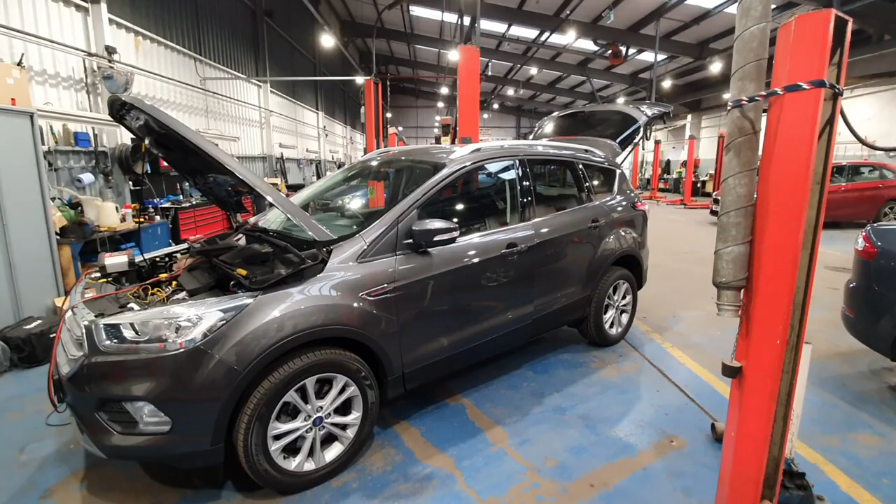Hello and welcome to another SJ Diagnostics video, and today we've got a 2018 Ford Kuga that's got a battery drain.

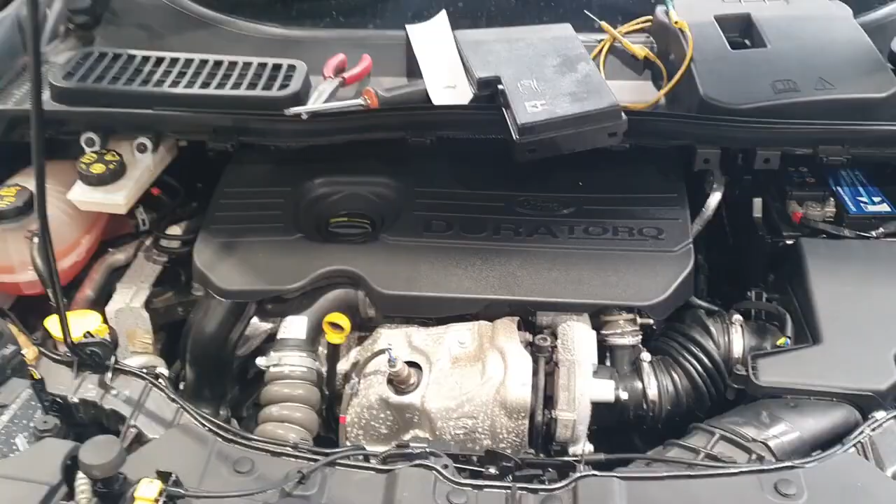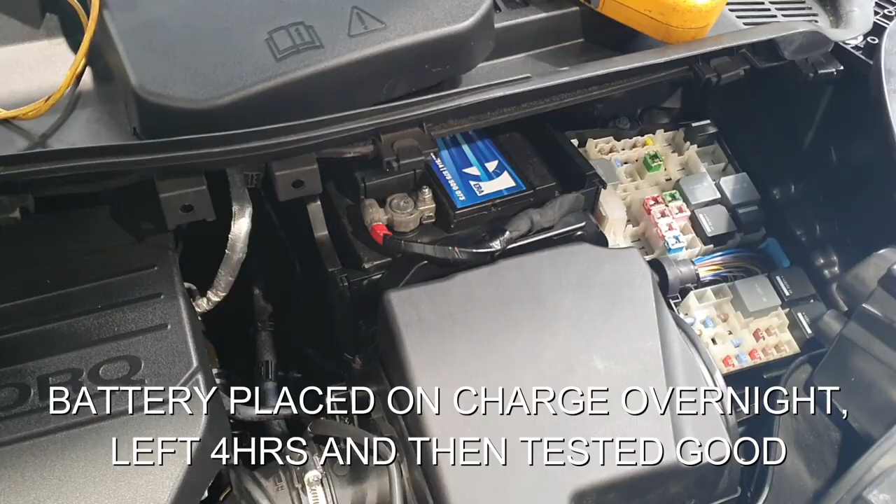So the vehicle came to us on the back of a recovery truck with a flat battery. They've told me it's a brand new battery. It's a make I've not seen before. I think it comes from a well-known 3-letter parts supplier in this country. So I'm going to put the battery on charge for a few hours and do a battery drain test, shut the vehicle down, see what sort of drain we've got.

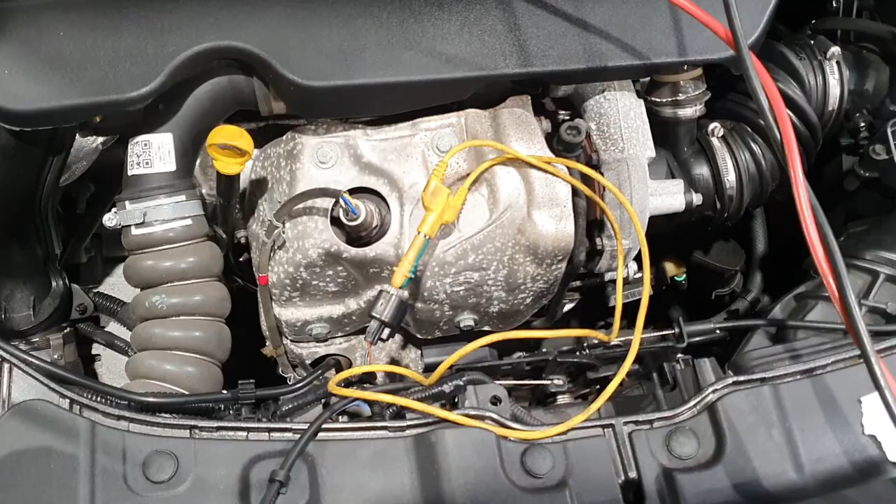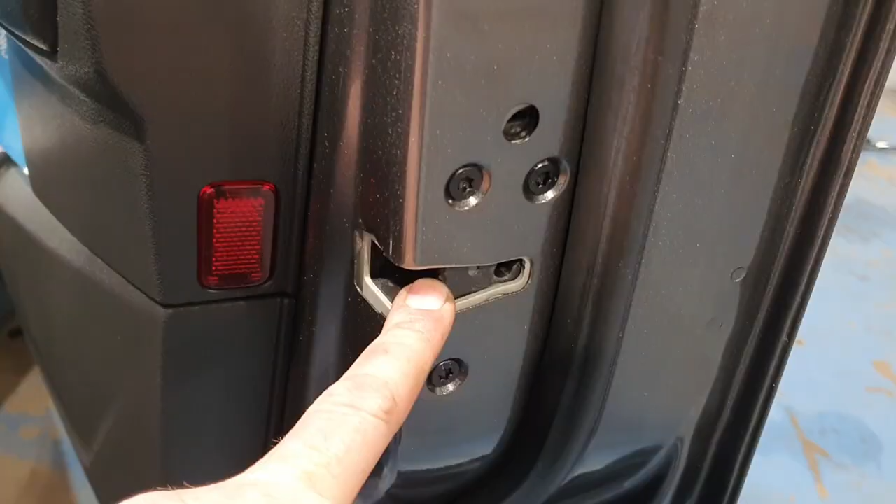So my method is, I roll all the door locks, simulate that the vehicle is completely locked up, but I've still got access to the vehicle. So I've just bypassed the bonnet switch, and I've rolled the catches on both front doors and also the tailgate. And I've also put some tape over the ultrasonic sensors for the alarm, and a little bit of tape on the steering wheel just to remind me that we've got tape covering up the sensors, because I have been known to send them out with the tape still on there.

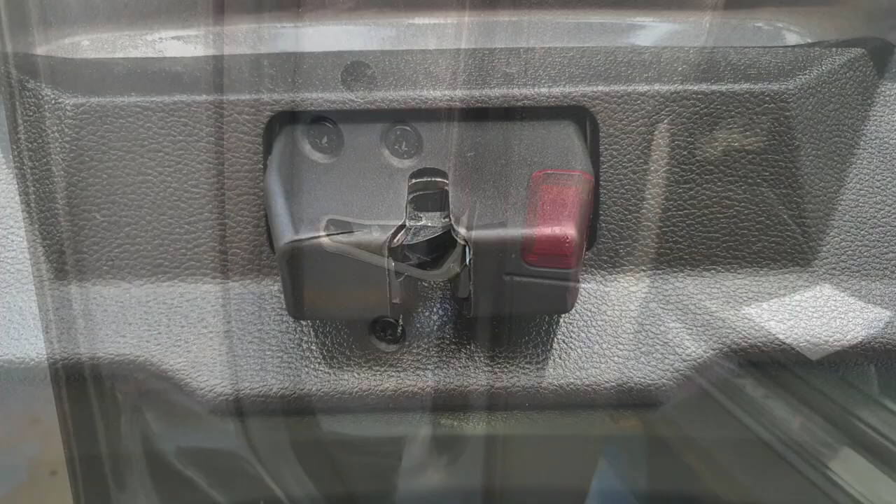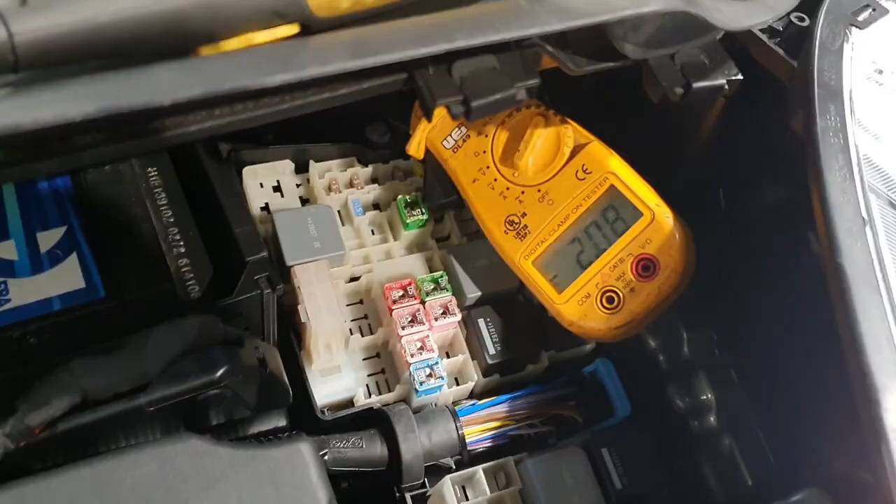Then we'll lock the vehicle up and see what drain we've got initially, and we'll go back to it in maybe 40 minutes time. So I've just locked the vehicle up and it's got an initial current drain of just over 2 amps. So we'll go back to it in about 40 minutes time and see what drain we've got then.

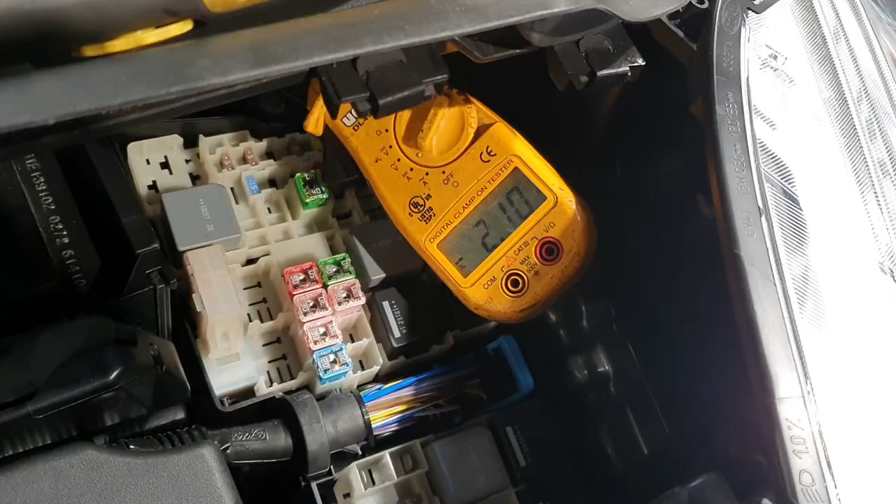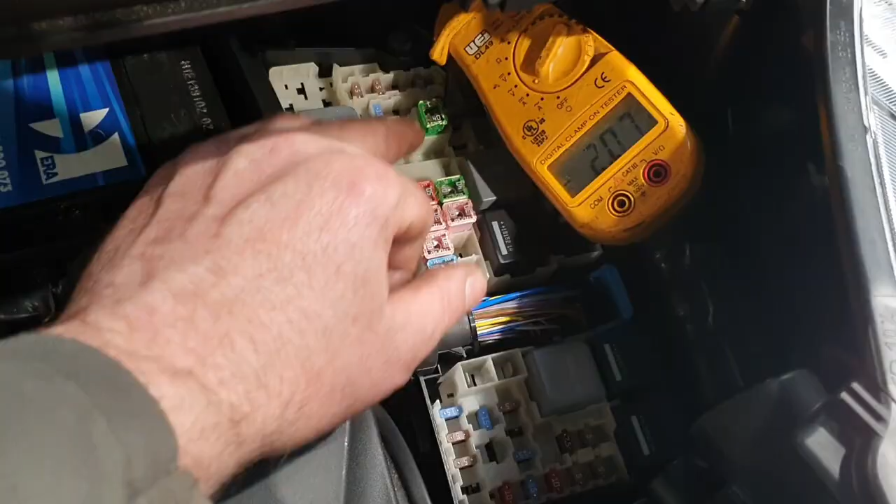Okay, so 45 minutes has passed and we've still got a drain there of just over 2 amps. So we've got something quite meaty that's draining the system. So what we need to do now is do a volt drop test across all the fuses. So we've got a fuse box here with the case style fuses. We just flip the lids off, and we've got normal mini fuses, a couple of relays as well, and we've also got the body control module which is under the glove box, and there's a fuse box in the rear as well.

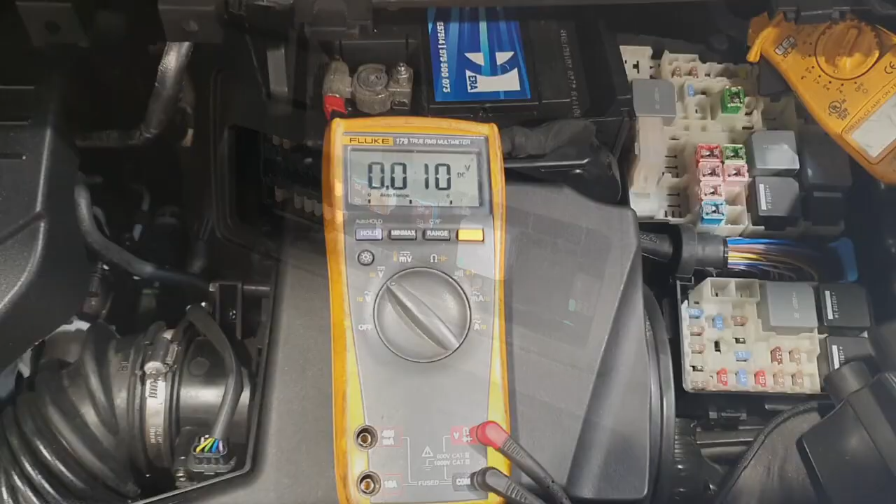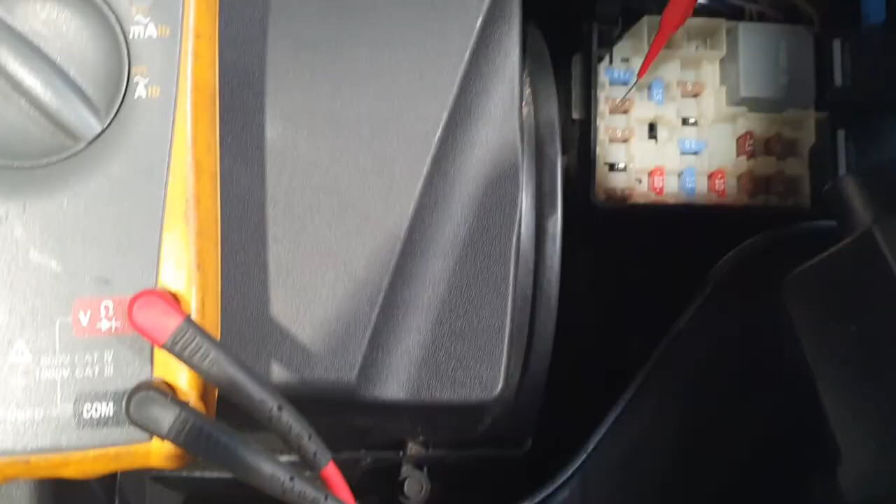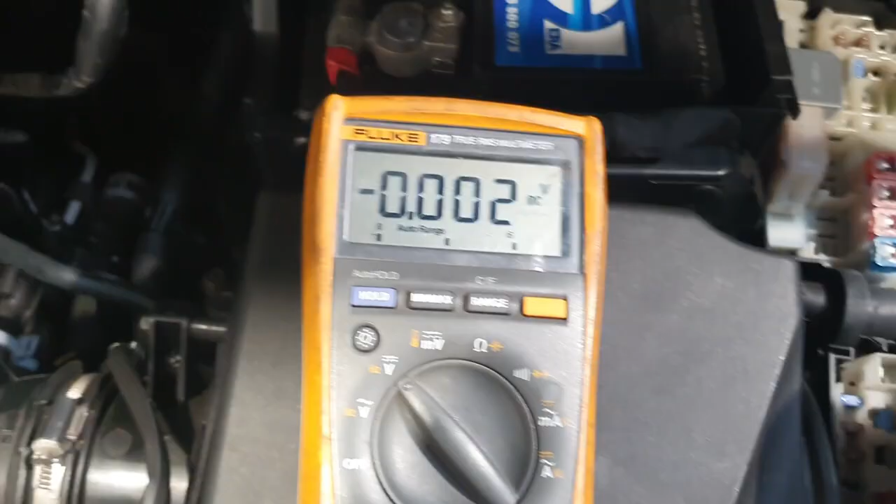Okay, so what I want to do now is do a volt drop test across the fuses. Difficult to do one-handed whilst holding the camera, but basically I put one side of the multimeter on the metal pin of the fuse, and then the other side of the multimeter on the other pin, and we measure the millivolts on the multimeter. Ideally we should be seeing 0.00. If I take it off, it'll go all over the place because we're measuring fresh air. So 0.00 is a good value. Any readings on there will indicate a milliamp drain.

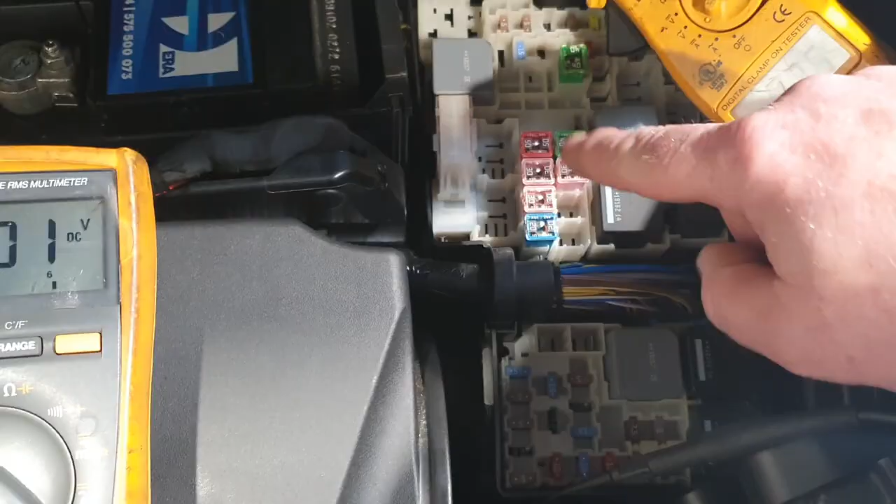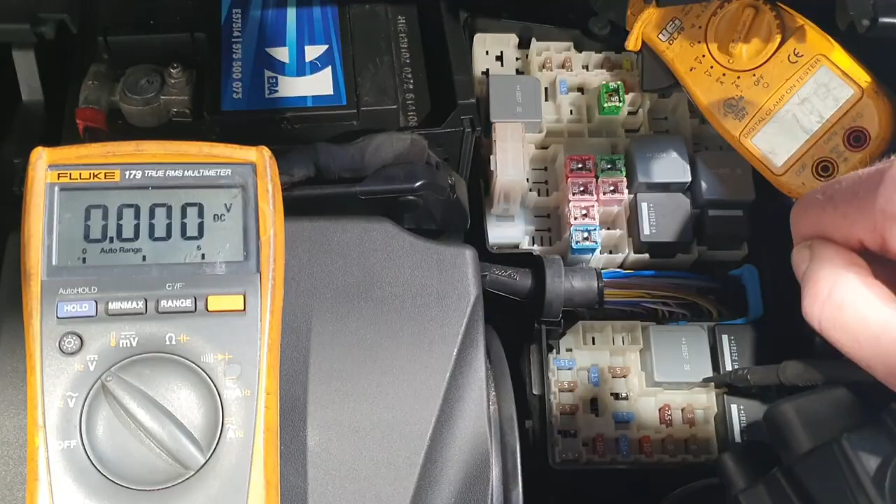So we go across every fuse in the fuse box, including the J-case fuses, which I'll have to flip the lid off, and measure all those. So we've got this under bonnet fuse box here, the body control module, and the fuse box in the rear. I'll not get too hung up on the values. I'll just write down each fuse that's got a drain on it and then proceed further from there.

So here, just for demonstration purposes, we can see I'm across the fuse there, and we're hovering between 0 and 1 millivolt, so nothing really there for me to worry about, but it is still a bit of a reading. So as mentioned before, I've got to go across every fuse now and take all the readings. Okay, so I've gone across every fuse. Don't think you really needed me to show you doing that.

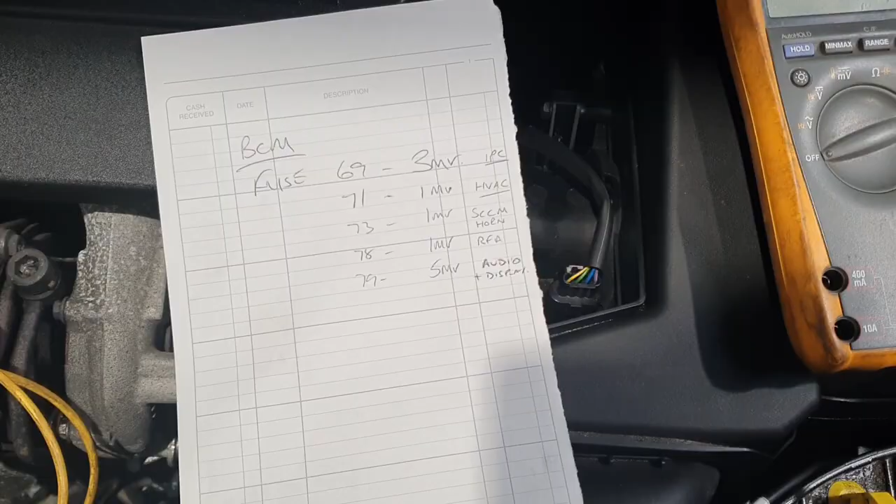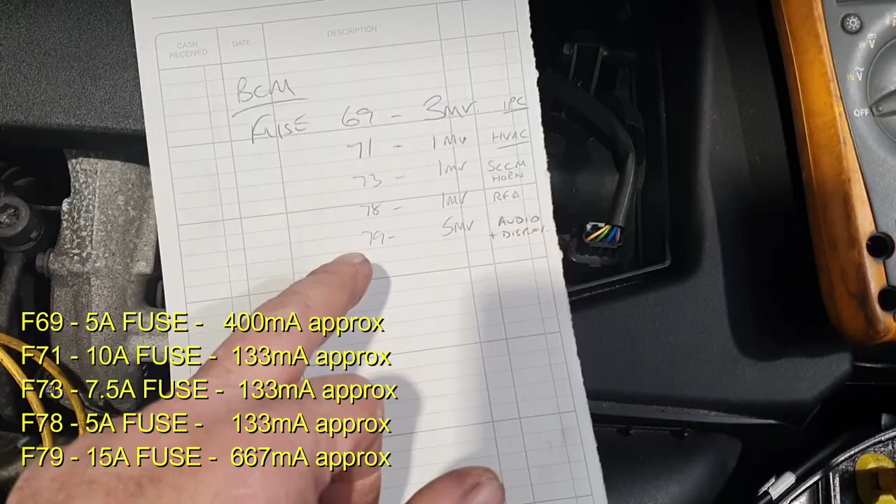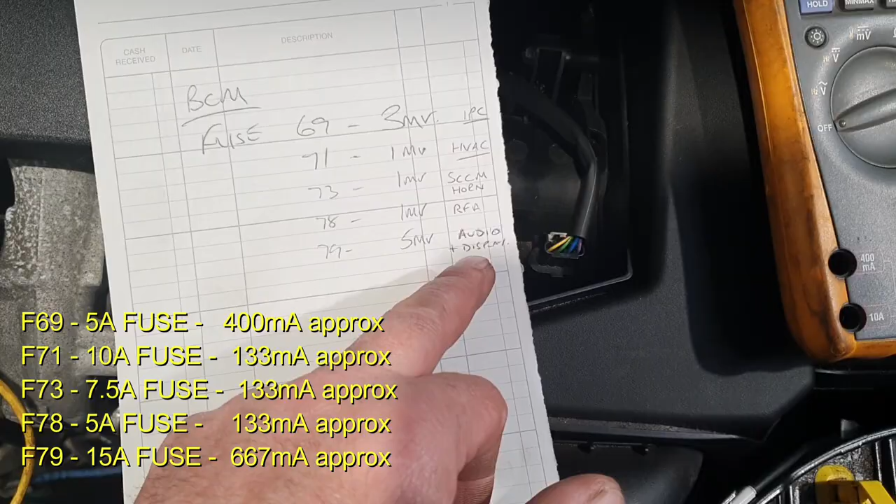And the only ones I can find any drains on are on the body control module. We've got fuse 69, 71, 73, 78, 79. Where we've got instrument panel, HVAC unit, steering column control module and alarm horn, remote function access module, audio unit and the display screen. I've just had a quick look as well to see if there's any common denominators, and they're all on the medium speed CAN network.

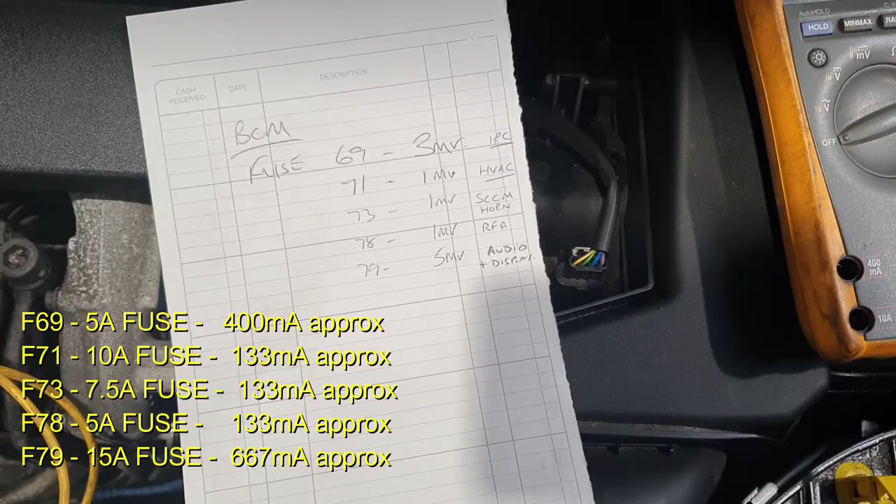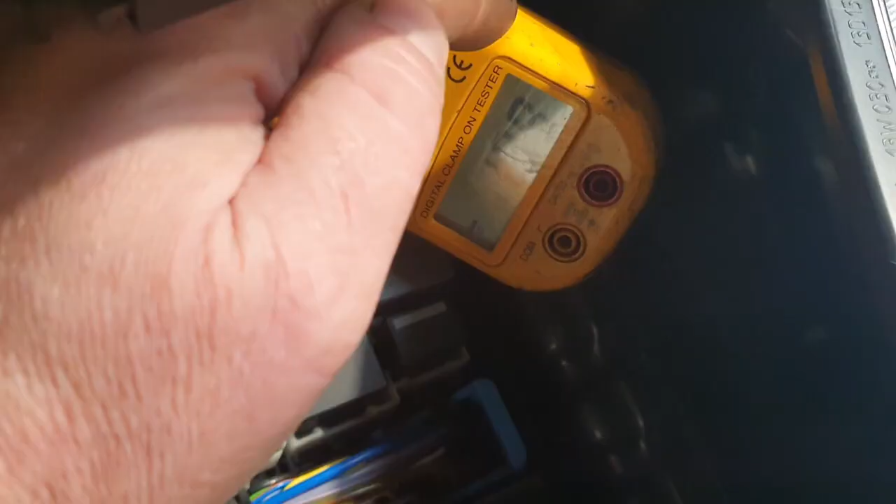So what I'm going to quickly do now is have a look whilst the vehicle's shut down, see if we've got any CAN activity on the vehicle, and just to prove as well, there we go, if you can see that 1.9 amp drain still going on. So let me get the scope rigged up or quickly go in with a multimeter and see what we've got.

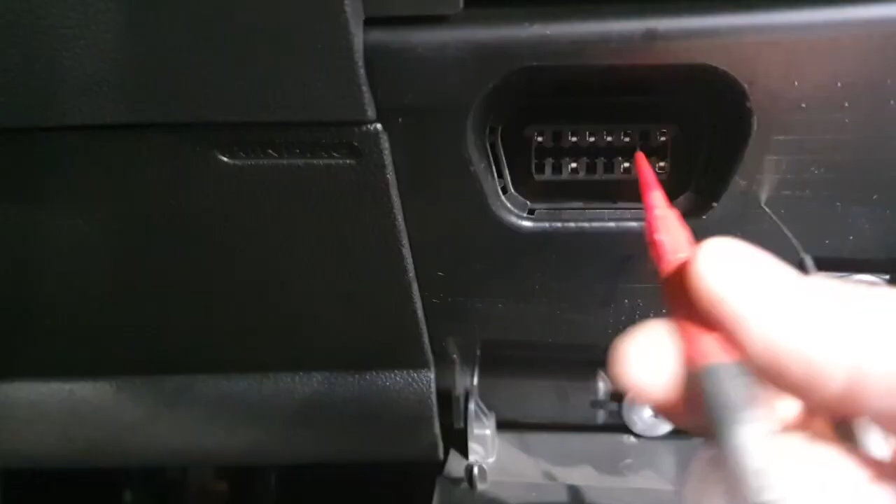So like I said, the vehicle is still shut down. I've just quickly gone into pins 6 and 14, that's the high speed CAN, and we're showing, if you can see that, 61 ohms. That's proving that the network is shut down. So if I now go into 3 and 11, which is medium speed CAN, sorry if the screen's gone dark there, can't avoid auto exposure. So in 3 and 11 now, and we're showing 0.8 mega ohms, so we've got some activity.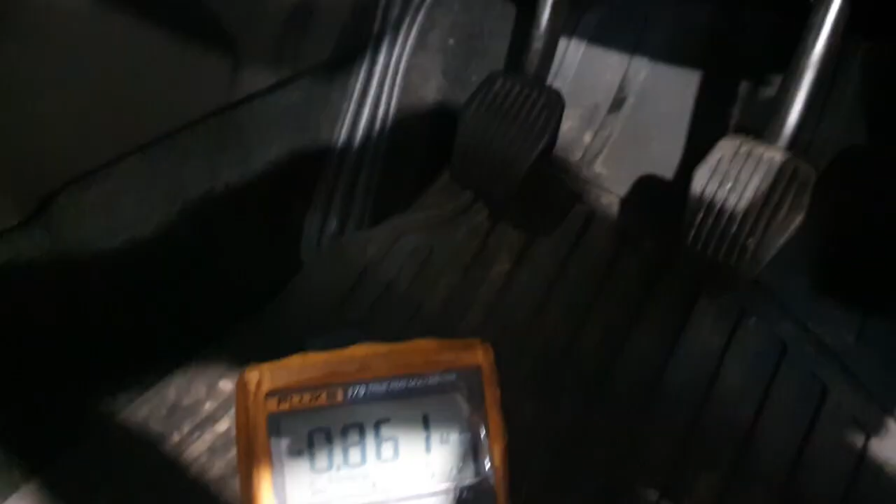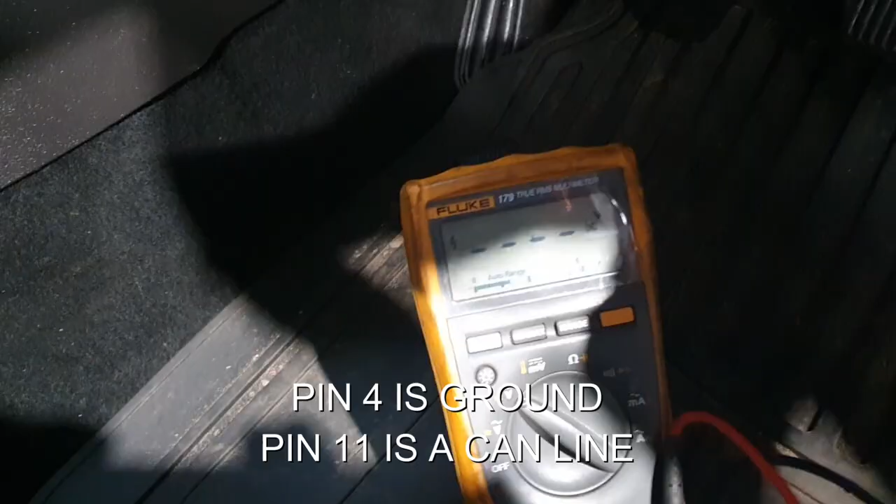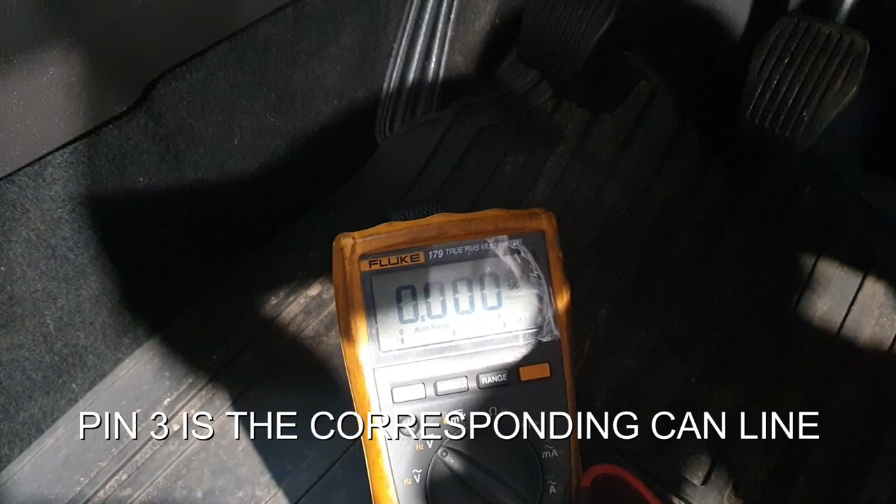So if I keep in pin 3 and change that to 4, and change that to a voltage, we've got 2 volts there. I'm thinking that will be CAN low on the medium speed. That's in pin 11. If I change that to pin 3, he says struggling to get it in. There you go. And that's 2.9. So the CAN network is still awake.

So I need to now, let me think, probably start. I don't really like pulling fuses, unfortunately, but I think it might be the done thing before we start stripping modules and everything down. So if I can find the fuses for each particular module, pull the fuse out, shut that module out of the network and see if we've got a difference on the amp drain, if that makes sense.

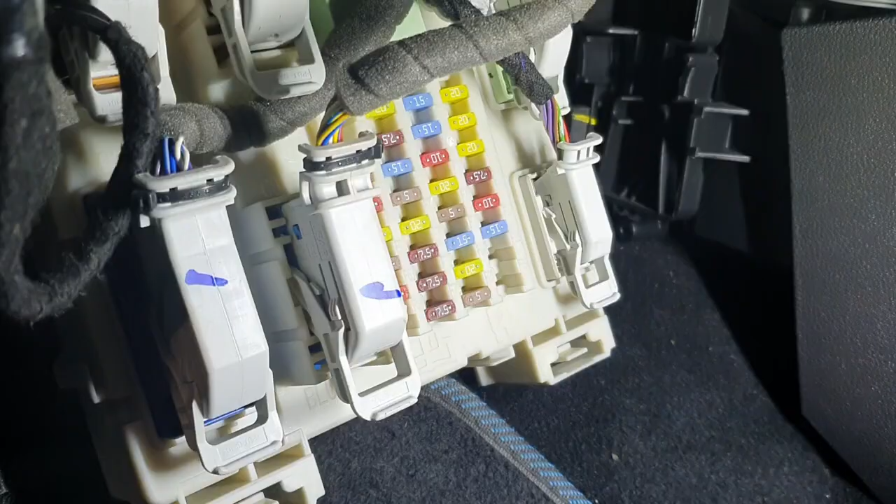Right, so we're underneath the glove box now. I've got the body control module loose, and the fuses, this row here, which had most of the drains on them, although the one with the most drain was fuse 79 if I remember right, this 15 amp one.

I've got a hunch, something I was told a long while ago regarding door handles. I'm going to pull out fuse number 5, that's for the remote function access module. That's what handles the central locking and door handles, because this has got key-free entry. Incidentally, the keys are 3 meters away at least, so they're not picking a signal up and keeping the vehicle awake.

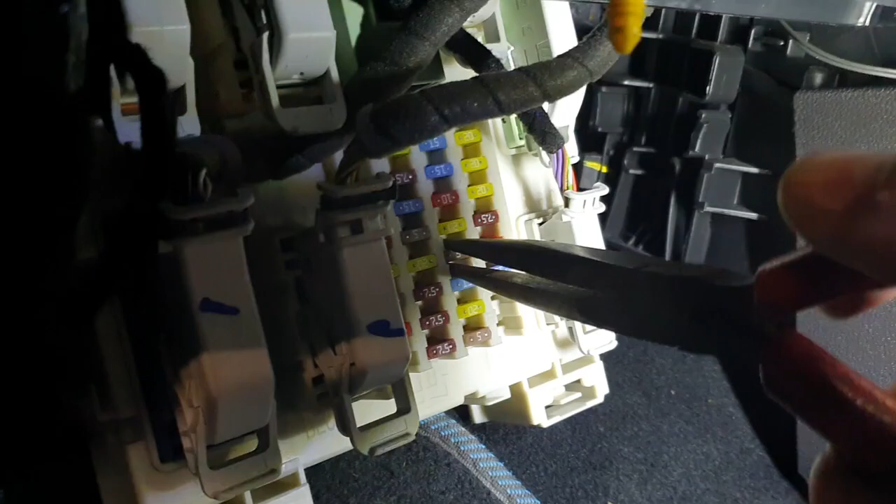So yeah, I'm just going to pull this out, which I think will be difficult with a loose body control module, so I'll just have to put the phone down, hoping that the alarm doesn't go off, which it hasn't. So that's the fuse out. There's its little hole there. Let's go have a look now at the drain, see if that's made any difference.

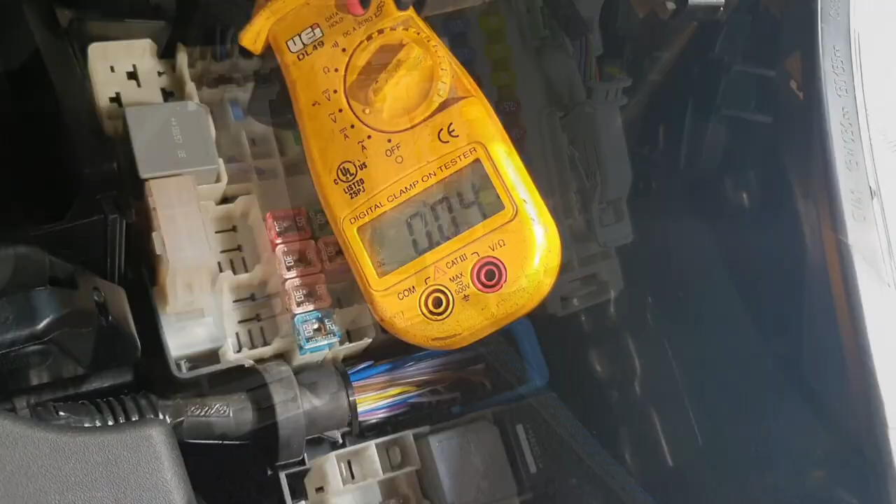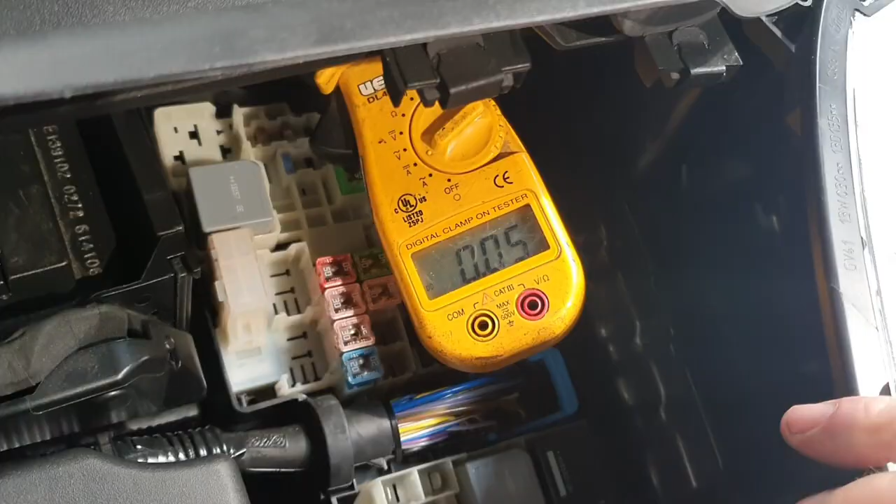So by pulling that fuse out, I've got a drain there of around about, obviously it's floating because it's an inductive clamp, but as you can see there, anywhere between 40 milliamps and 70 milliamps. So let's just turn it off and on. Let's zero it. Put it back on the negative cable, and in all fairness, that's good enough for me.

So what I need to do now is I'll wake the vehicle back up and we'll get some live data and check these door handles, and I'll show you what I mean. Incidentally, I've just put the fuse back in, ready to get the vehicle back awake again, and as you can see, we've gone straight back up to 1.9 amps.

Okay, so I've woken the vehicle back up, I've connected the diag machine to it, run a system scan, and as you can see, we've got no fault codes in there. So what I'm going to do now, just to hopefully prove a point, I'm going to go to live data.

I'll go to all because I've already pre-populated it, and press play, and as you can see there, left front handle lock is saying on, left front handle unlock is off, right front handle lock is off, and unlock is off.

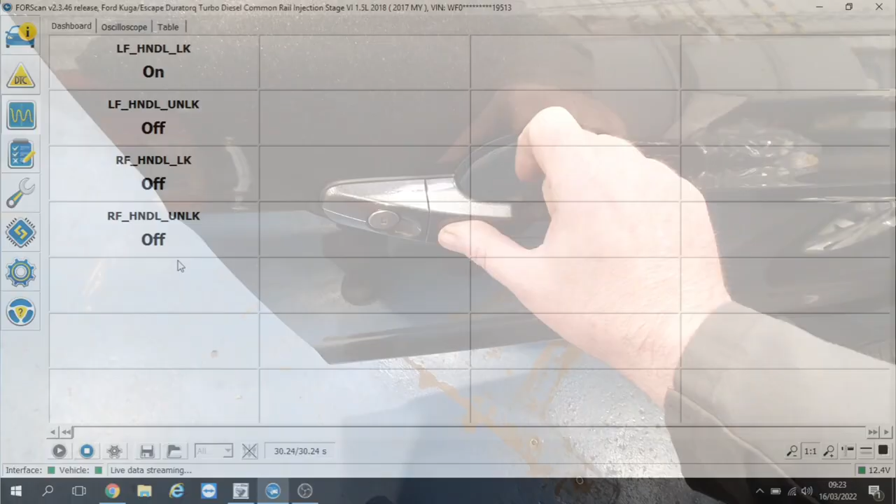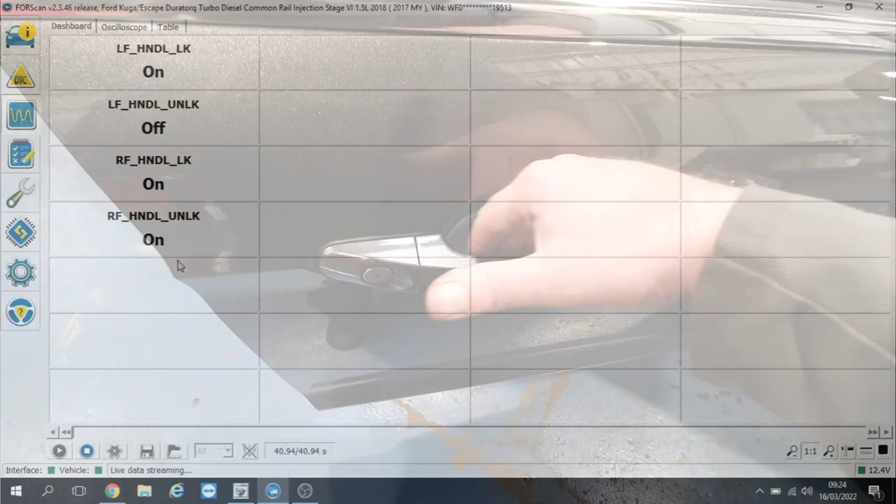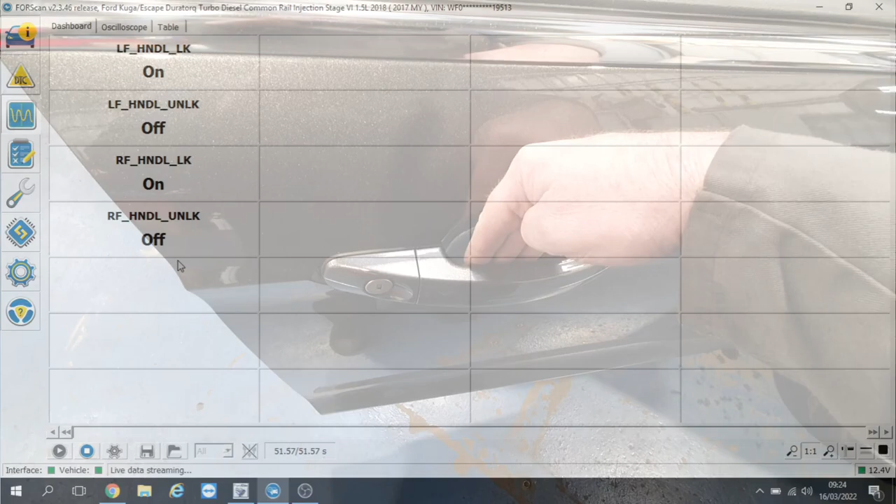And just to prove a point, whilst you look at the live data, that's me pressing the on button, and then as you can see, when I let go of it, it goes to off, but it immediately goes back to on again. And the unlock, if I put my hand on it, that's on, off, on, off. Just move my thumb for you. On, off, on, off.

And likewise, if I go round to the passenger side, so here we are at the passenger side, and if I press the on button, it immediately turns to off, but then goes to on again. And then unlock, on, off, on, off.

So it's looking like we've got faulty capacitive sensors in both the front door handles, and I'll prove it in a second by taking the door handles off, unplugging them, shutting the vehicle down, and see if it shuts down properly.

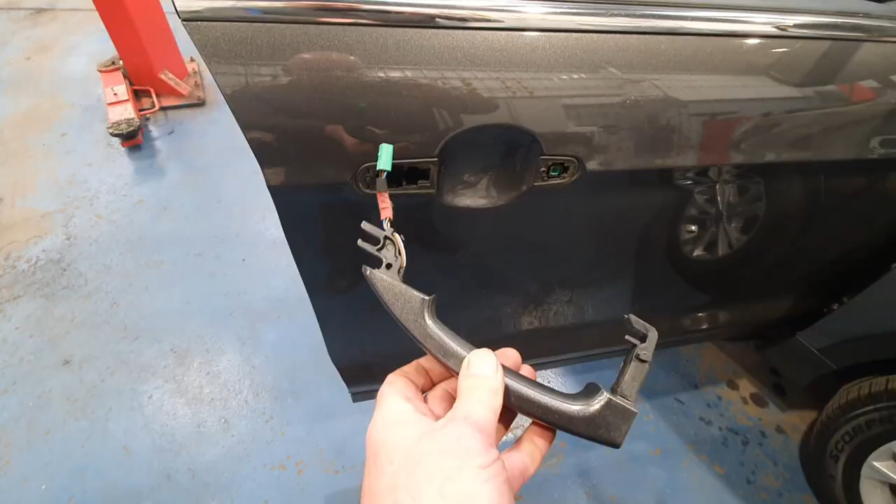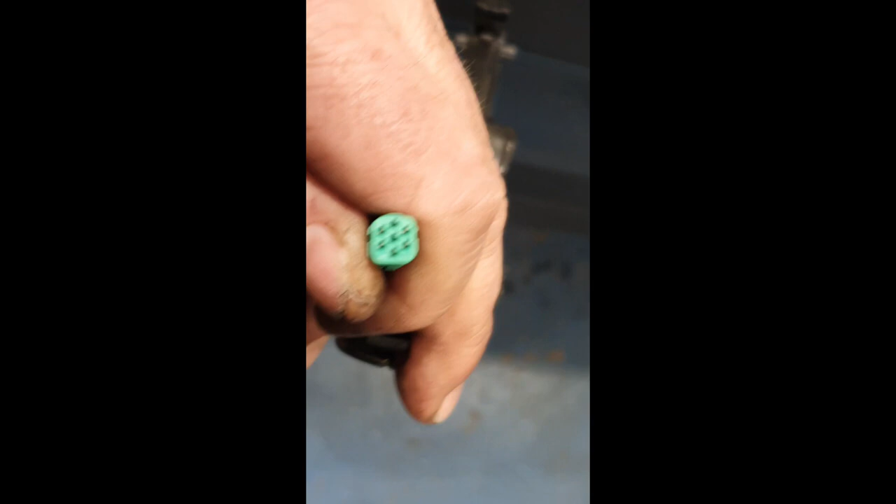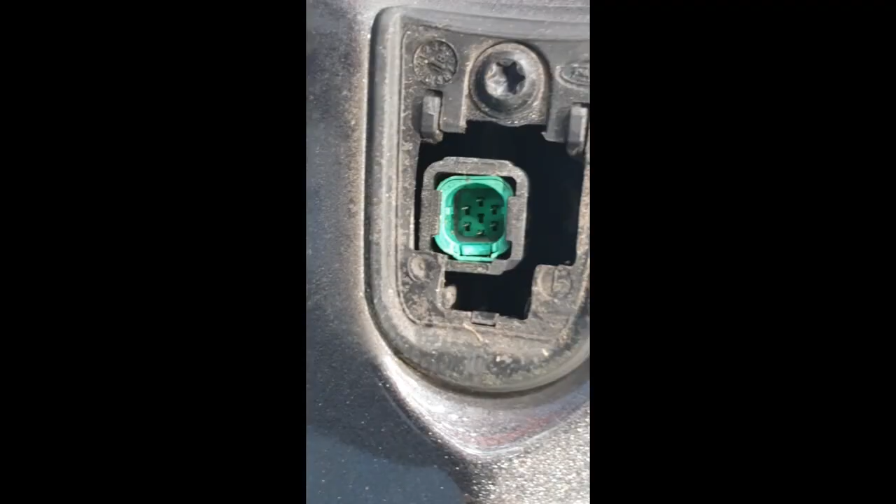Okay, so we've got both of the door handles off. That's the door handle with a capacitive sensor underneath my thumb there, and the electrical connector. So what we'll do now, we will lock the vehicle up. And looking at the connections on the handle itself, there's no signs of any corrosion or water ingress. And likewise in the door itself, in the multi-plug, and that's the same on both sides.

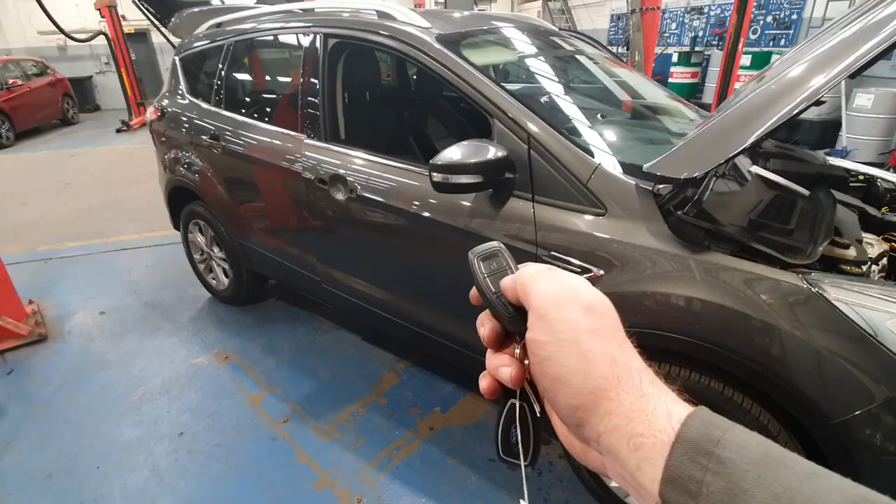So we've got the door locks rolled again, bonnet catch is bypassed, tailgate lock is rolled as well. Door handles are off, hopefully it will lock up. So let's lock it. So that's locked and confirmed. Mirrors have gone in as well.

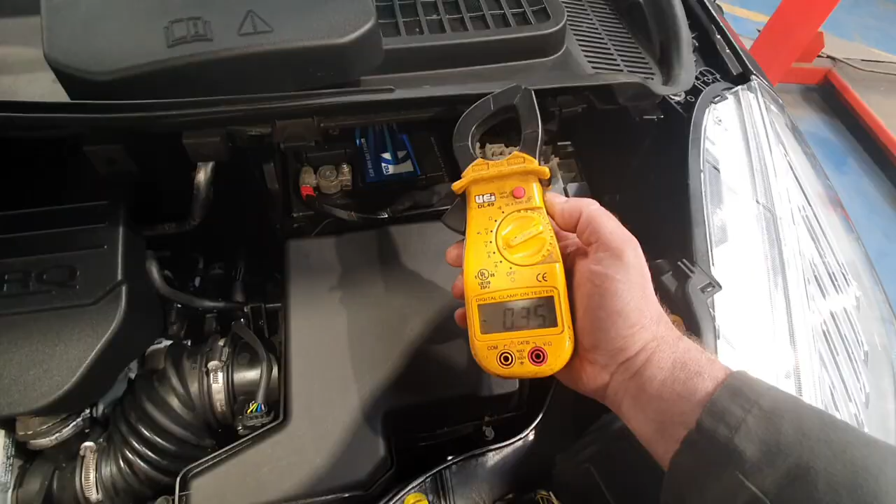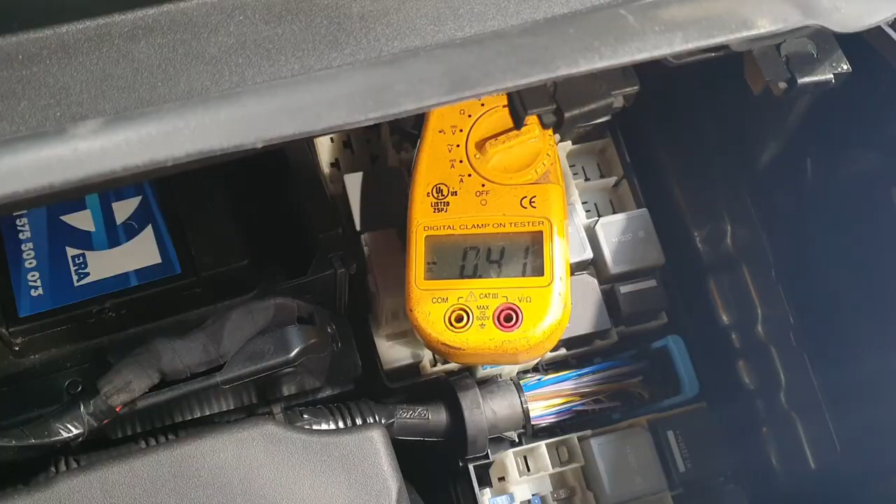And I will just take off the inductive clamp, switch it on, zero it, put it back on the negative cable, and we're sat at 0.35 amp there, so that's a massive difference already. So what I'll do now, we'll leave it for half an hour and come back and see what it shuts down to.

So we're about 40 minutes later, and as you can see there, again it's an inductive clamp, so it will range a little bit, but we're shutting down there between 30 milliamps and around about 70 milliamps. If I was to take the battery out, which I've got a video showing how to do, not the easiest or the quickest of jobs, I can put the multimeter in series and get a true reading, but compared to the 2 amp drain we had before, I'm happy with that.

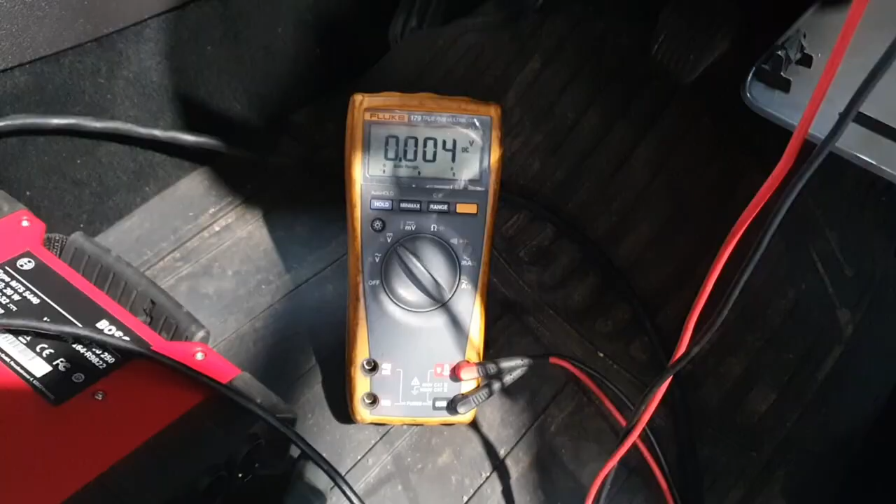And what we'll do now, we'll go and see if the CAN network has shut down, which I'm sure it has. And there we go, CAN network. I'm in pins 4 and 3, so that's a ground and one of the CAN medium speed wires, and it's shut down, 0 volts. So 2 door handles needed.

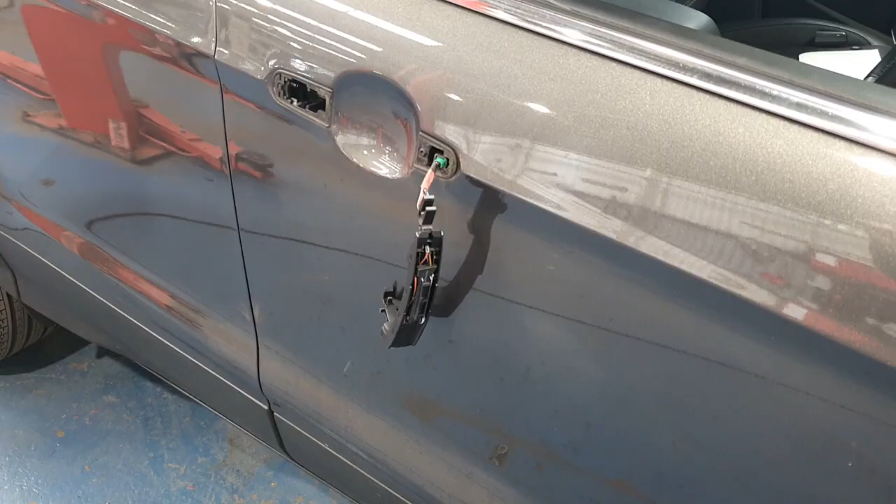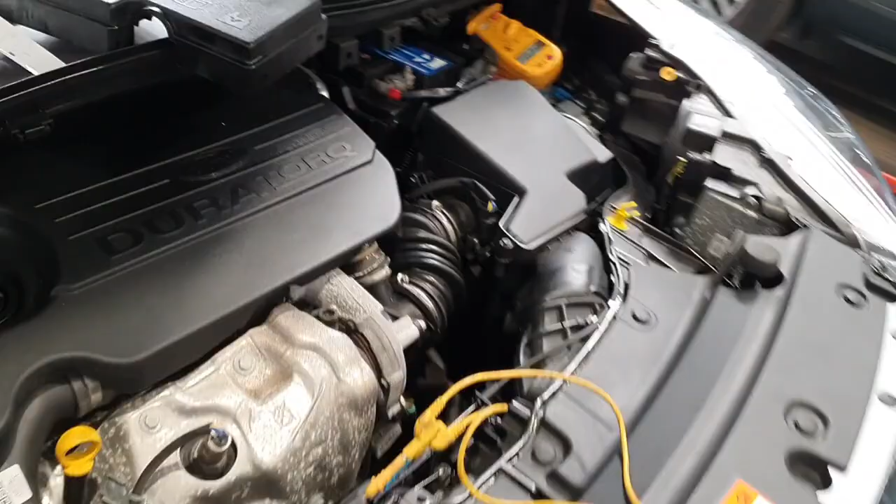So as always, I like to verify my fix. So it's the next day now. I've got both handles connected. The handle covers are in the body shop at the moment, being painted. The vehicle is shut down, and just to prove the fix, there we go, we've shut down to round about, well, 30 milliamps I would say maximum.